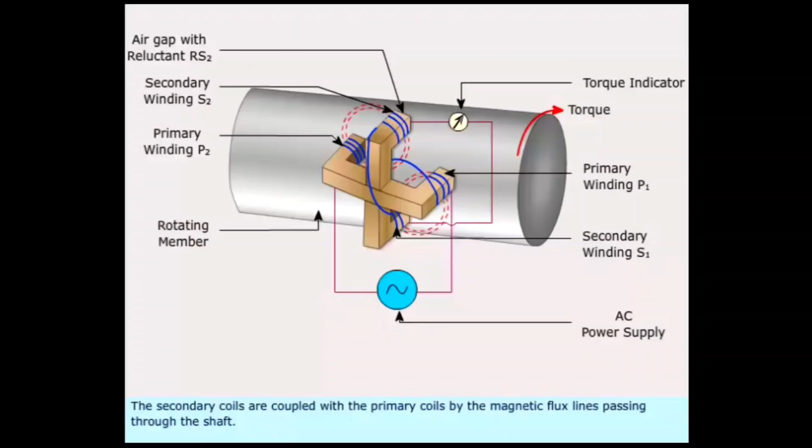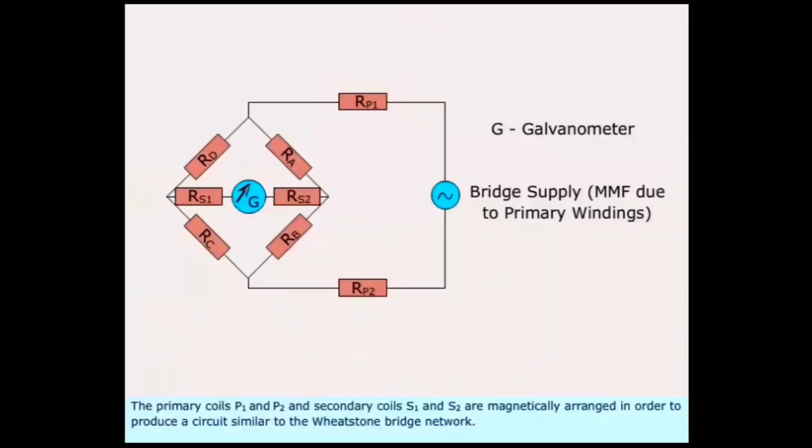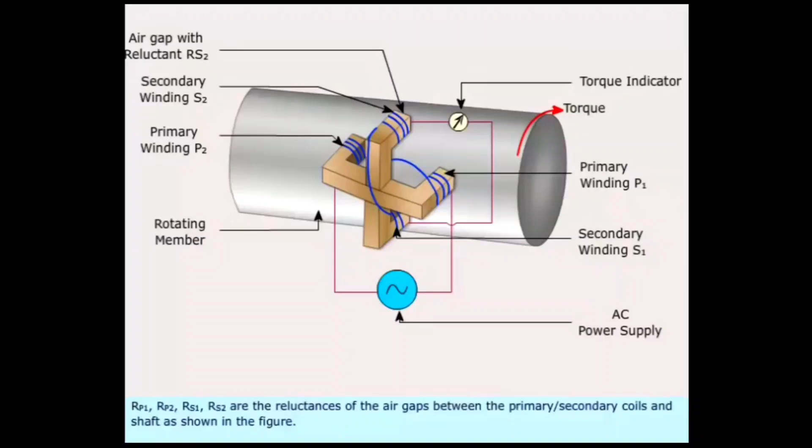The primary coils P1 and P2 and secondary coils S1 and S2 are magnetically arranged in order to produce a circuit similar to the Wheatstone bridge network. RP1, RP2, RS1, RS2 are the reluctances of the air gaps between the primary or secondary coils and shaft as shown in the figure. RA, RB, RC, and RD are the reluctances produced in the shaft.

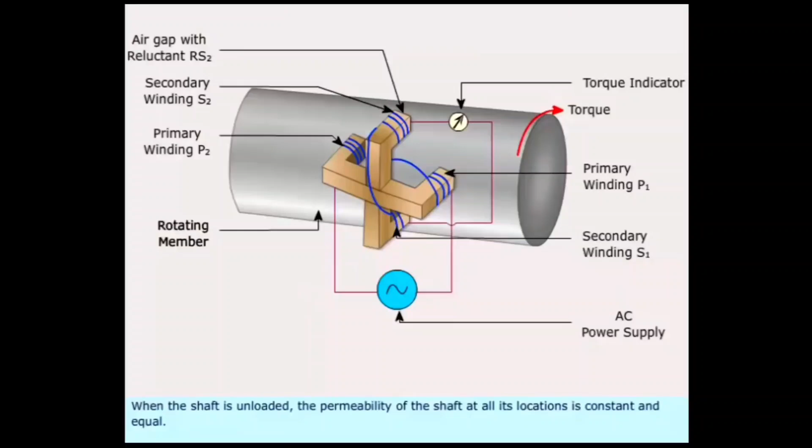When the shaft is unloaded, the permeability of the shaft at all its locations is constant and equal. During this condition, the opposite voltages induced in the secondary coils, S1 and S2, are equal, and hence they cancel each other. The torque output of the shaft is therefore 0.

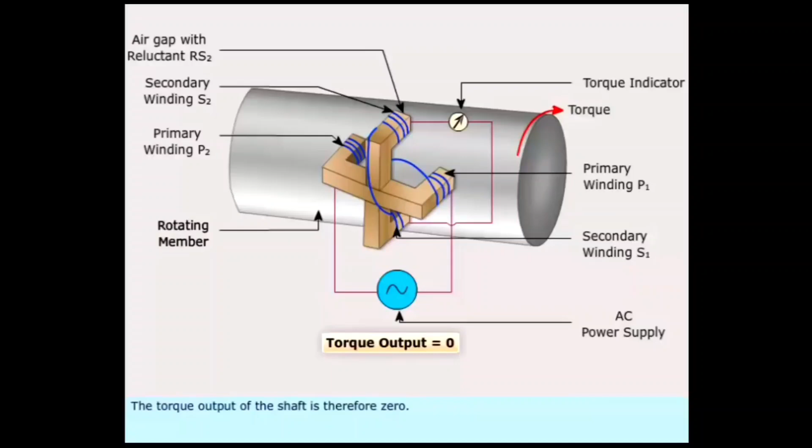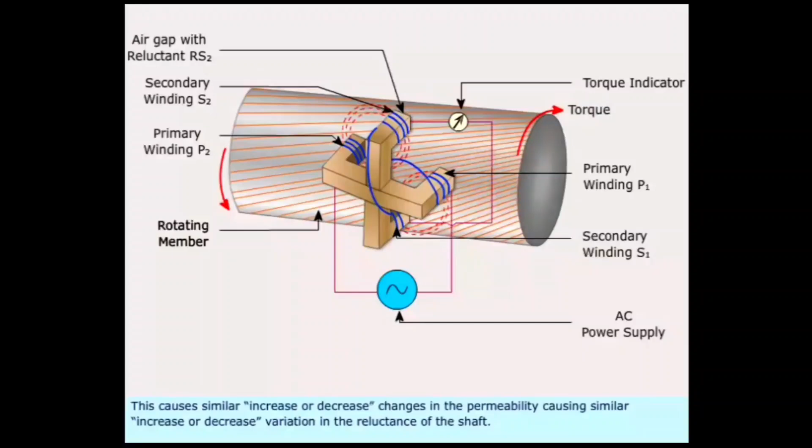When a load is applied on the shaft, the permeability increases in the direction of tension and decreases in the direction of compression. This causes similar increase or decrease changes in the permeability, causing similar increase or decrease variation in the reluctance of the shaft. The variations in the reluctances vary the inductance of the coils S1 and S2.

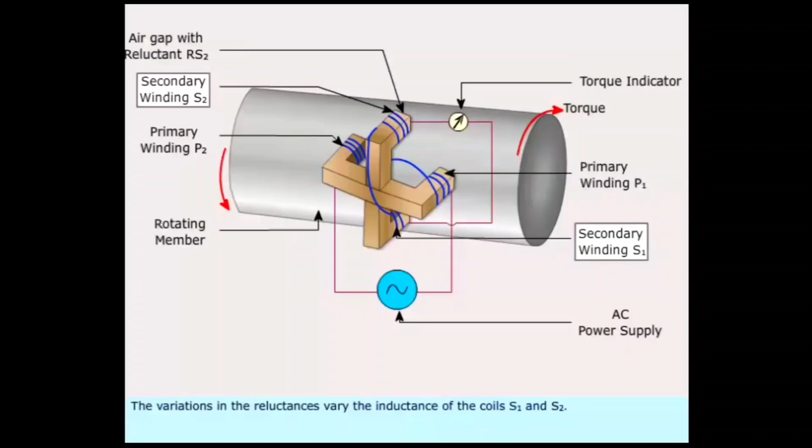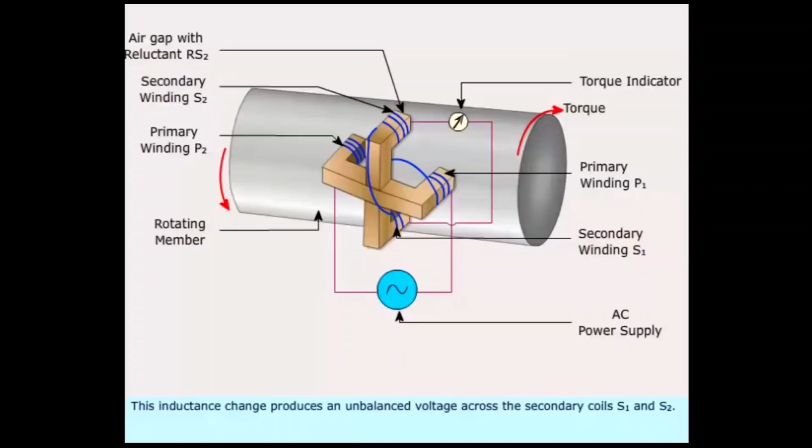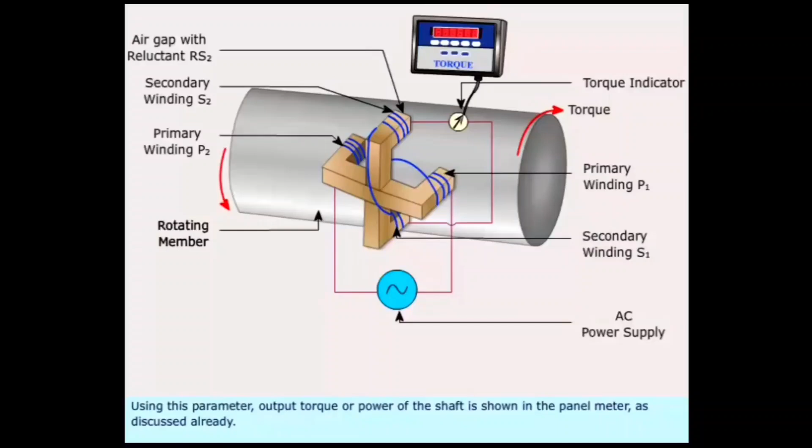This inductance change produces an unbalanced voltage across the secondary coils S1 and S2. The algebraic sum of these voltages is proportional to the applied torque. Using this parameter, output torque or power of the shaft is shown in the panel meter, as discussed already. The equivalent circuit of the scheme is shown in the diagram.

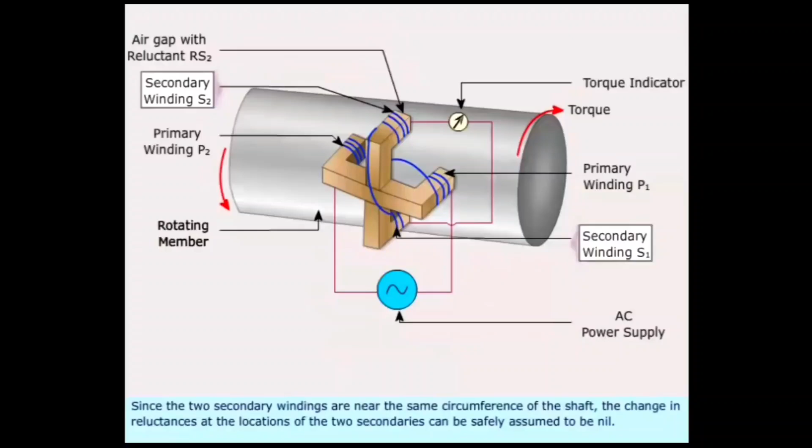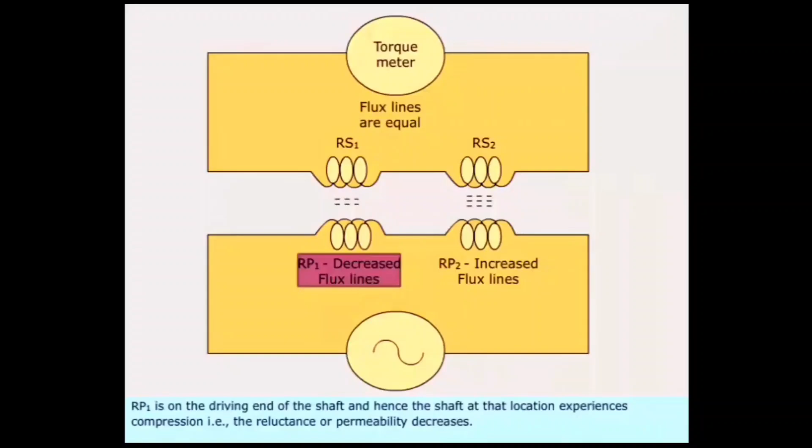Since the two secondary windings are near the same circumference of the shaft, the change in reluctances at the locations of the two secondaries can be safely assumed to be nil. RP1 is on the driving end of the shaft, and hence the shaft at that location experiences compression, that is, the reluctance or permeability decreases.

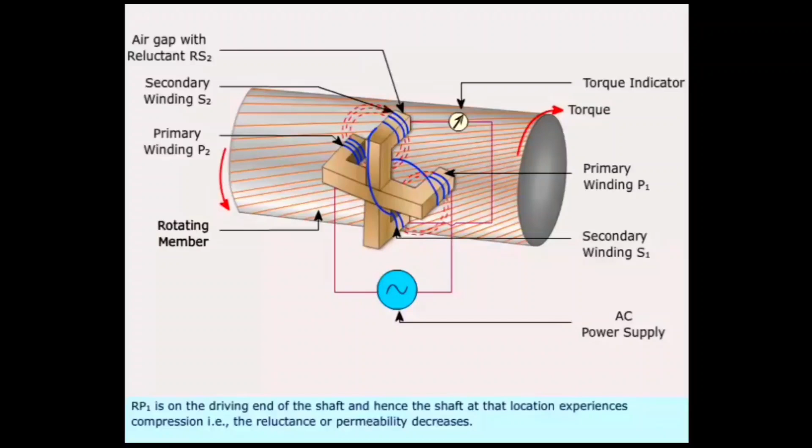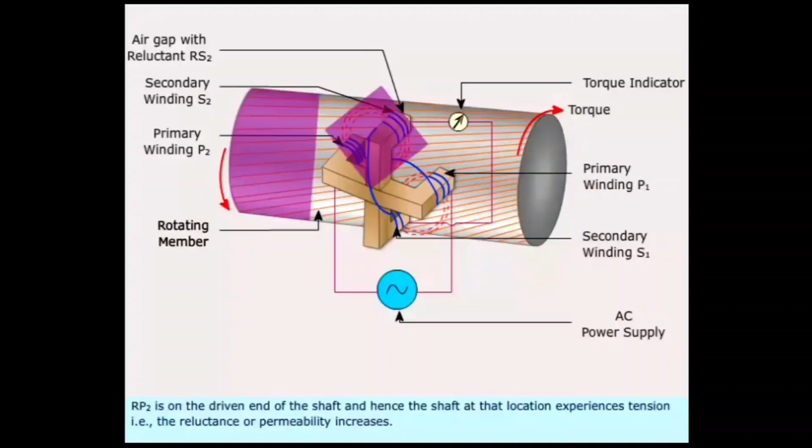RP2 is on the driven end of the shaft, and hence the shaft at that location experiences tension, that is, the reluctance or permeability increases. Thus, the resultant of primary fluxes has a net value depending upon the load on the shaft. Hence, there develops a resultant secondary voltage between the two secondaries, which is fed to the torque meter. Thus, you have learnt about the construction and working of stationary reluctance type torque sensor.